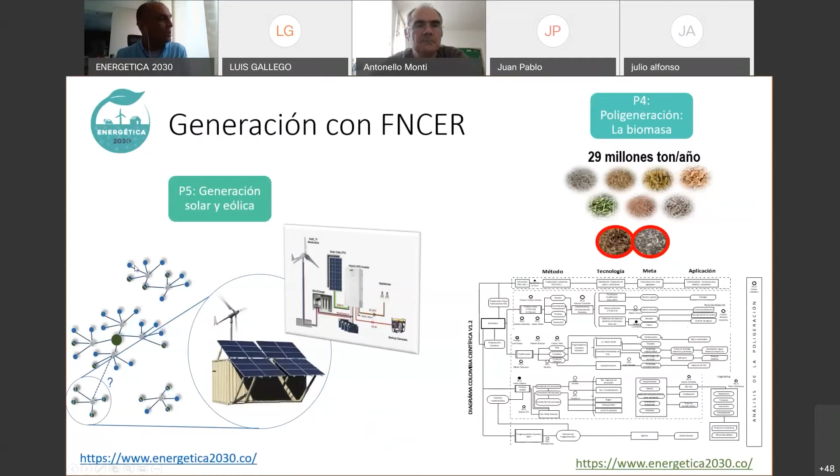Otros dos proyectos enfocados hacia la política de regulación de mercados que se van a tener con estas nuevas características. Análisis de escenarios futuros, cómo serán los escenarios del 2030, cuáles son los aspectos que pasarán, y de eso hablaremos en una futura charla de estos webinars.

Tenemos otros dos proyectos: proyecto 8, que es de pruebas de microrredes con conceptos de microrredes en diferentes instituciones para probar diferentes esquemas que se pueden tener en estas microrredes; y un proyecto que yo lidero, que tiene que ver con la supervisión, control y protecciones de sistemas eléctricos a gran escala, que va muy de la mano con la operación del sistema con XM.

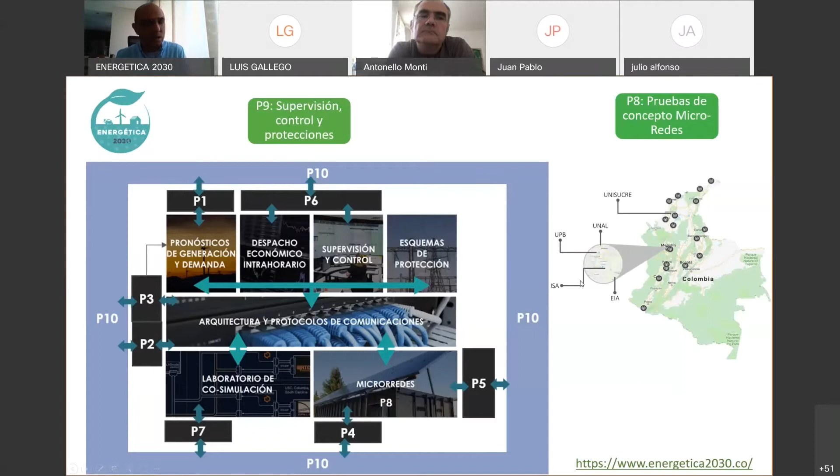Y finalmente, el proyecto 10 está relacionado a la apropiación social y alternativas de producción de consumo de energía en Colombia. Es ver cómo estas tecnologías se pueden realmente transferir, porque es uno de los retos más importantes de la transferencia. Y aquí participan antropólogos y sociólogos que nos están ayudando a desarrollar este punto.

Como les decía, el proyecto P9 es uno de los proyectos más ambiciosos que tenemos, enfocado en varios objetivos, pero que finalmente hace toda la integración de los centros de control del futuro y que permitirá avizorar cómo desarrollarnos. Aquí tenemos una interacción muy fuerte con el equipo de la Universidad de Aachen y Jülich, especialmente en todo lo que es simulación en tiempo real.

El profesor Antonello Monti y el doctor Mirz nos van a mostrar una de las teorías que han desarrollado en los últimos años sobre dinámica, la teoría de fasores dinámicos y su aplicación en sistemas de potencia. El profesor Monti es el líder del Instituto de Automatización de Sistemas de Potencia Complejos en el centro de E.ON de energía, en Alemania. Y Marcus es el líder de software, de productos de software y desarrollo de modelado para simulación en tiempo real. Son los coautores de los fasores dinámicos como el DPSIM, un simulador de tiempo real.

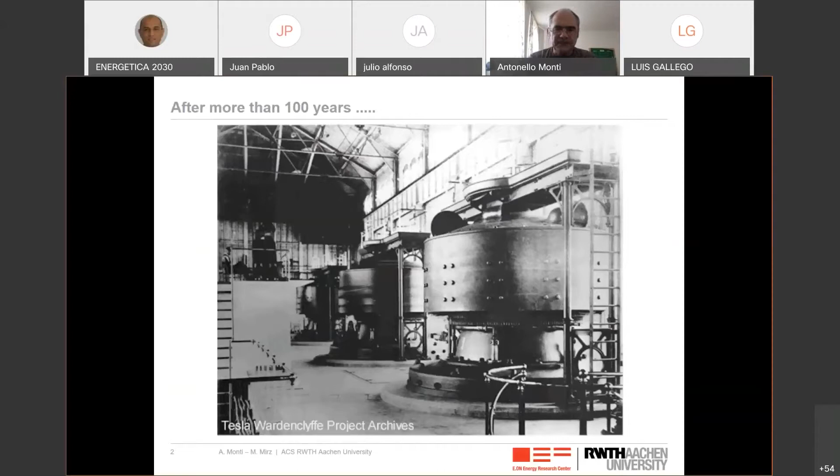If we move forward about 100 years, next, then we get some more recent development. This is a DC-DC converter built in our research center, mostly by my colleague, Professor De Doncker.

That's full power electronics. So after more than 100 years in which some fundamental concepts were basically written in stone and clear, we are now moving from an electromechanical network to a network that progressively is more and more an electronic network. Because we're talking in the context of 2030, at least looking at the current ambition of the European Union and the member states, 2030 will mostly already be an electronic network.

But what's interesting is that even today, if you look at some numbers, particularly more familiar with Germany, we already had instances in which the network was running with extremely high penetration of renewables. We have to distinguish between energy as a quantity over a year, a month, or a day, but from a power system dynamics perspective, even 10 minutes running with 100% renewable penetration means the presence of electromechanical devices has been dramatically reduced. It's still not zero, those rotating masses are still there, but we're clearly moving toward a situation where their presence is reduced.

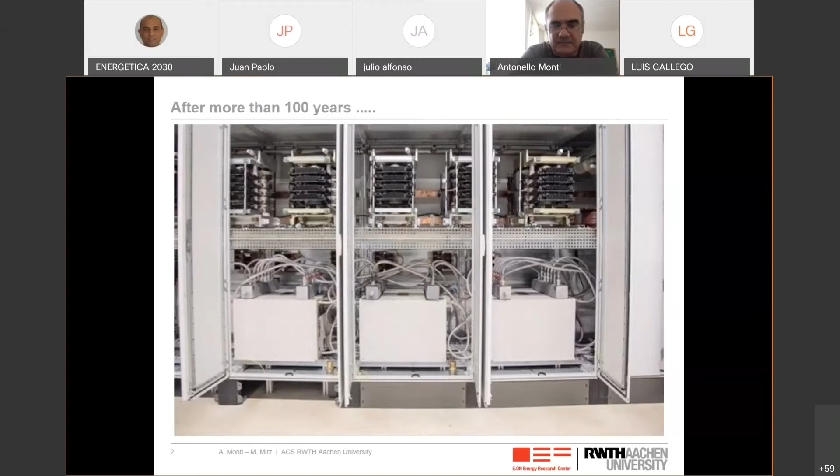What does that mean? That means that some quantities, like frequency for example, become a little bit harder to define.

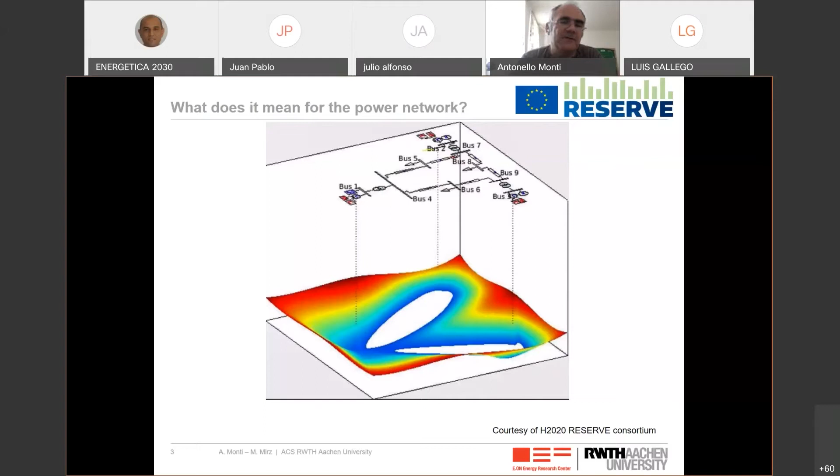This animation is something we did together with our partner, particularly University College Dublin. My colleague Federico Milano developed this scenario in the EU project Reserve. What you see here is an animation on the famous 9-bus system from IEEE, slightly modified for the purpose, introducing more renewables. While we're used to thinking about frequency as a global quantity, in a simple scenario like this one, frequency—shown in the color map at the bottom—doesn't have a steady state value and is highly dependent on position, so classical ideas of a common frequency across the power system are hard to support as a reference for modeling or analysis.

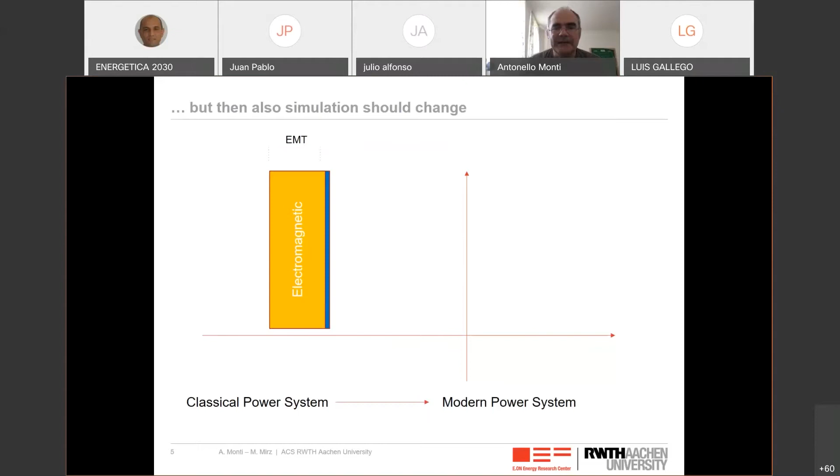Fast forward into the future, and from the classical power system we move to the modern power systems, and we need a tool that fulfills the new categories of eigenvalues and the new mix with not clear separations. That's what we've been trying to target with what we call dynamic phasors.

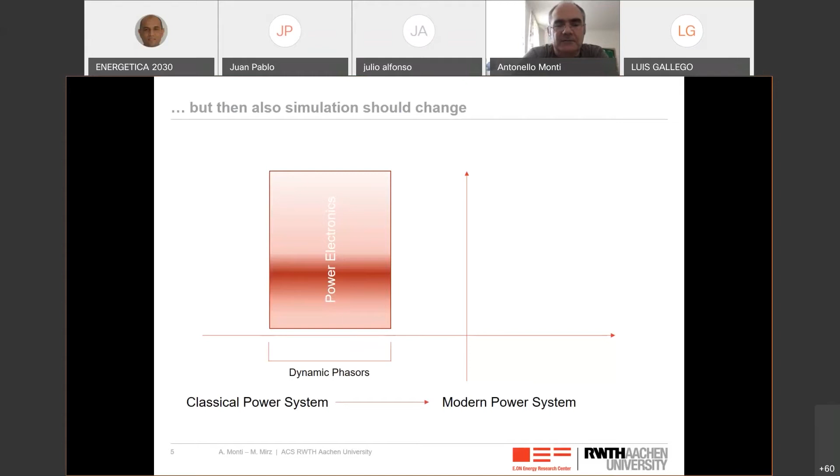I'd like to clarify from the beginning, and Marcus will be even more precise than me later. We use the term dynamic phasor, even though internally I've been discussing a lot if this is appropriate, because dynamic phasor is a quantity defined in a clear standard from the PMU point of view. Our definition of dynamic phasor is broader in frequency, more flexible. It's the best name we can have at the moment - there isn't a right terminology, I would say. But the idea is that it's a phasor with time dependency.

How large is the spectrum with which we analyze this phasor? It's a choice that, nice to know from the beginning, in our simulation approach can be done even at runtime. That's, I think, one of the major features and value of the work that Marcus will detail in the next few slides, because we really have a flexible tool that even online can adapt its capability of modeling.

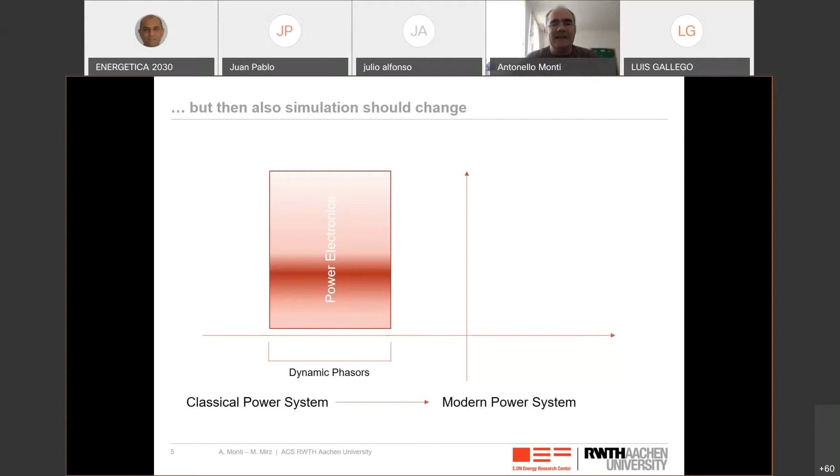A little bit more then on the motivation. We have been investigating why we need this solution. We've been trying to find a new solution capable of real-time simulation to improve system models, and also to look at the possibility of applications like digital twin. So creating a flexible model able to run in real time, able to run and learn from data - this is another important feature. And so having the possibility of both scenarios, offline and real time, but clearly a major part and major interest is in the real-time simulation part.

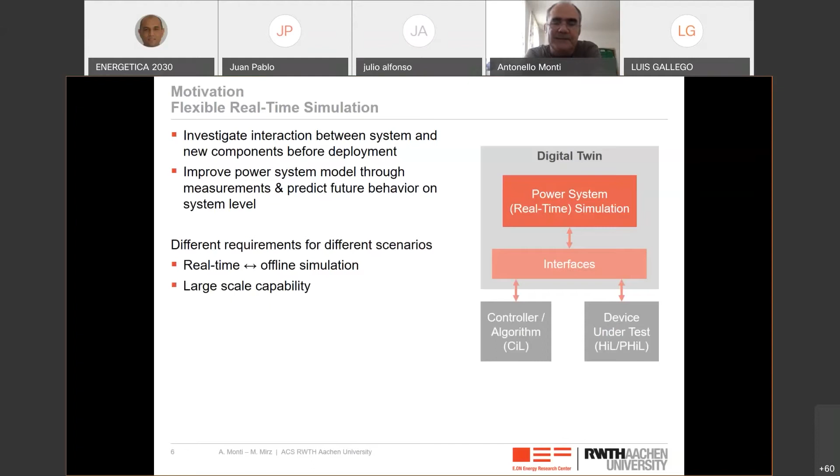We want to have large scale capability. My personal dream is one day to have a very good interconnected model of the whole of Europe, but at the same time with the capability to go also into high levels of detail. Those two requirements in the past were, by definition, somehow a contradiction. So we need a new simulation approach able to change focus and bring together those two requirements that originally and traditionally were in contradiction.

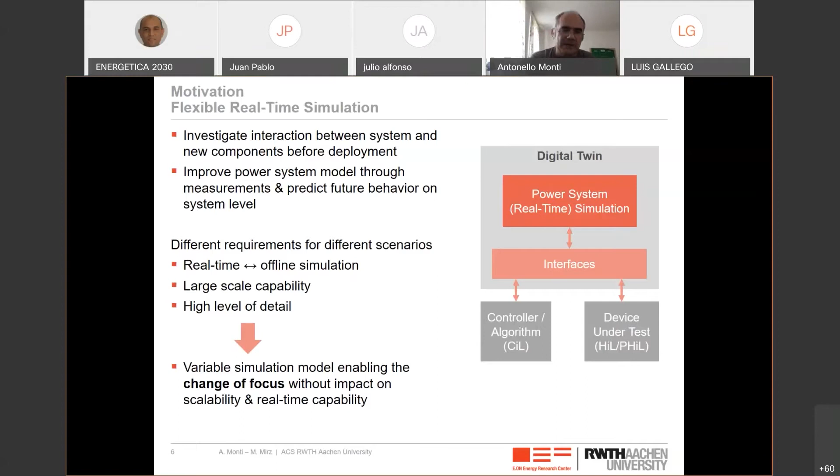That's basically how, looking from standard solutions and also market-level tools that we have, starting from the classical definition I said before, the different types of eigenvalues and dynamics - the thermal electromechanical could be tackled by large high-performance computing clusters, with a high level of scalability, but using basically static simulation from the electromechanical, let's say quasi-static.

And then the idea to go to electromagnetics means normally right now going into custom solutions. There are a lot of very good commercial tools that apply high-performance computing paradigms, but using custom hardware and custom bus, all the way to, if you want to get to the details of power electronics, including FPGA as an option when we need to go down to the under-microsecond timescale that power electronics scenarios may require. But we don't have a way to smoothly integrate.

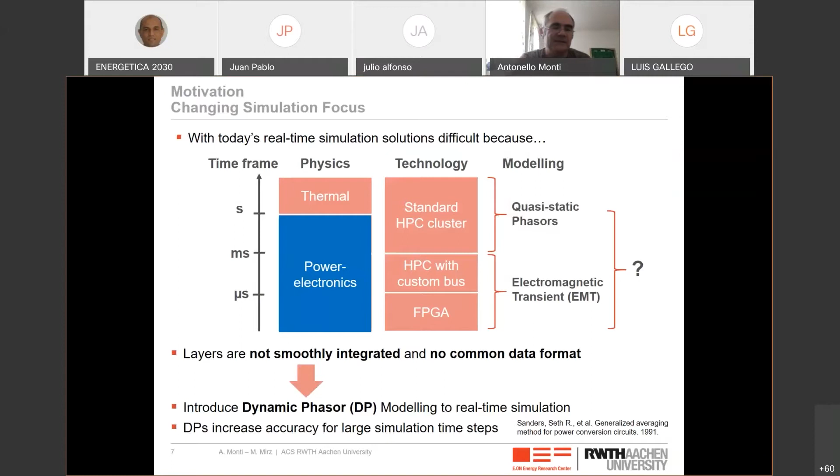That's what we need in the power electronics scenario. That's why we felt there is a need for a new approach that could do that and also allow us to have a good data management perspective. As we'll see later, that's also one of the tasks - to develop something able to work with data according to standards, so that integration of operations within a utility can be done without having a different format for simulation versus operation.

That's where this dynamic phasor modeling came into play as a solution, and it's basically an extension of ideas that have been around for a while. Here in the slide we reference a paper from Seth Sanders, developed at MIT in the beginning of the 90s. But what we have done is start from that fundamental theory and develop an open, flexible, extensible solver able to support this type of challenge that we've been discussing so far.

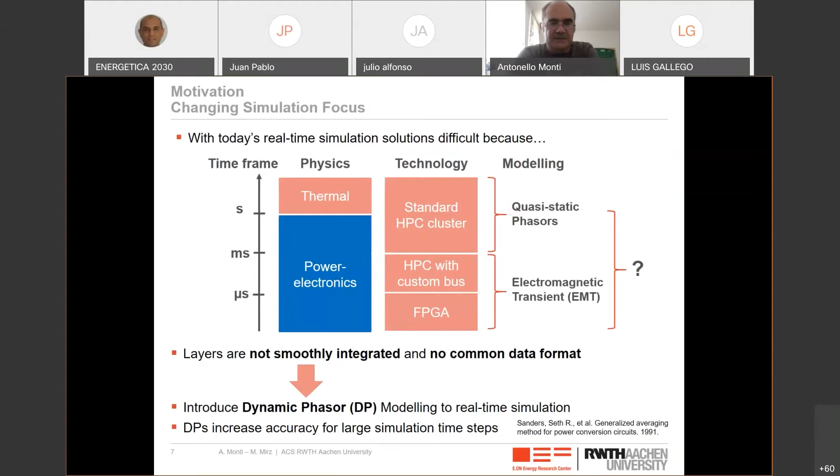From my perspective, last but not least, before I give the floor to Markus - we can also extend the time step, because we have the capability of keeping accuracy for longer time steps in several situations. We also support linking in real time different laboratories, research centers, or even different operating centers. That's the dream I told you about - connecting a network of laboratories in Europe for the definition of a digital twin of Europe.

But as you know, in Energetica, this dream is already going on in Colombia. It's a much more realistic scenario, I would say. You guys are really doing it already right now. And I think that's an interesting opportunity.

Particularly from the research perspective, this presentation and discussion today is proof of that - it's also a way to create collaboration and scientific exchange. Because we don't require specific hardware, we talk about democratization of real-time simulation. Everybody can use our software on any kind of PC or platform running Linux operating systems, which helps create international cooperation like the one behind the talk we have today.

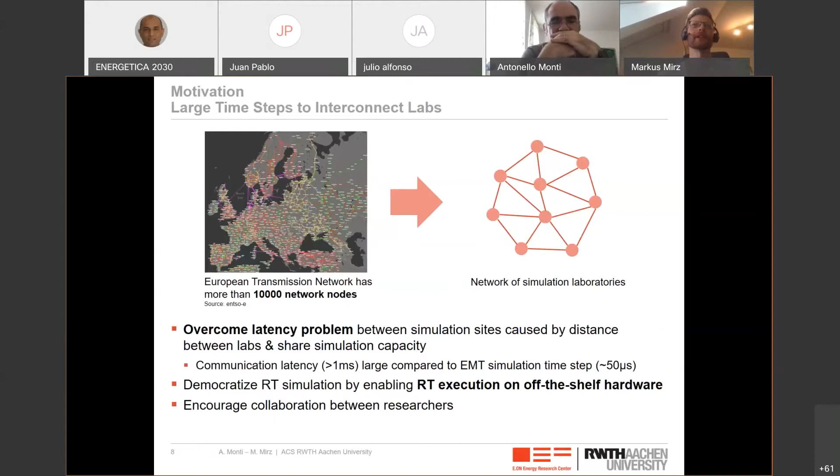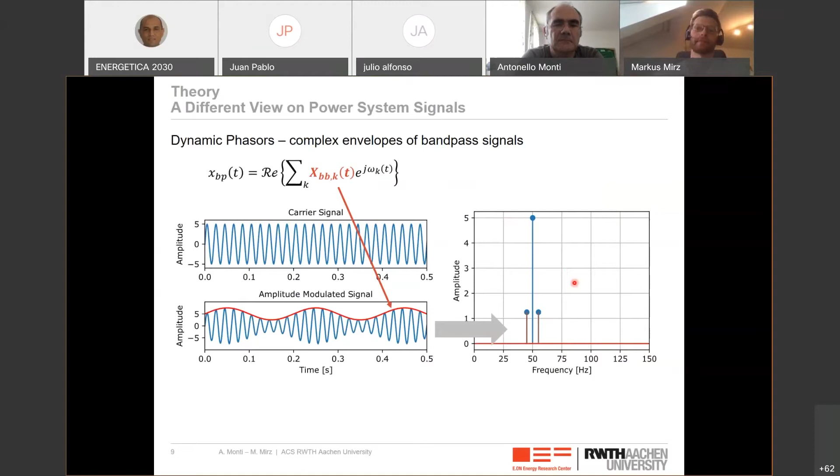A nice feature of this approach is that since we're not looking at the 50 Hertz plus signal anymore, but the shifted signal around 0 Hertz, we can simulate this with a lower sampling rate in our simulation. As Professor Monti mentioned, this approach bridges the gap between EMT and quasi-static simulation.

The idea is quite old, but I guess the reason it wasn't so popular for many years is that only now are we really looking into very high frequencies with power electronics coming into power systems. If we look at other domains, like microwave engineering, approaches like dynamic phasors - maybe they call it differently, like baseband representation - are much more popular there than they are in power systems right now.

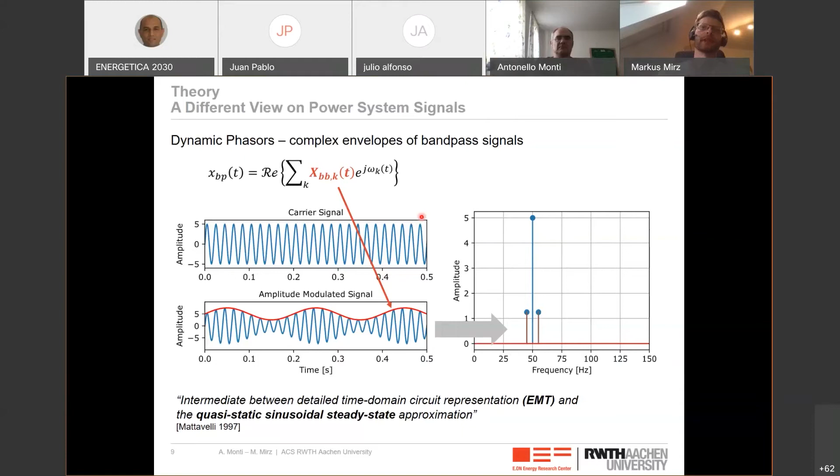So, the next question is: how can we use this approach in a simulation? For this, I want to demonstrate again why we can use a lower sampling rate in the process of simulating the dynamic phasors compared to our EMT signals.

On the other hand, if I use the dynamic phasor approach in simulation, and I shift my signal to 0 Hertz as I explained before, the sampling rate that you require is much smaller. In the previous example this was only shown for a 50 Hertz signal and some modulation of it, but you can actually use the same approach if you have several of these frequency regions or frequency bins. For example, here you can shift both of your frequency regions to 0 Hertz and use a larger time step, a smaller sampling rate.

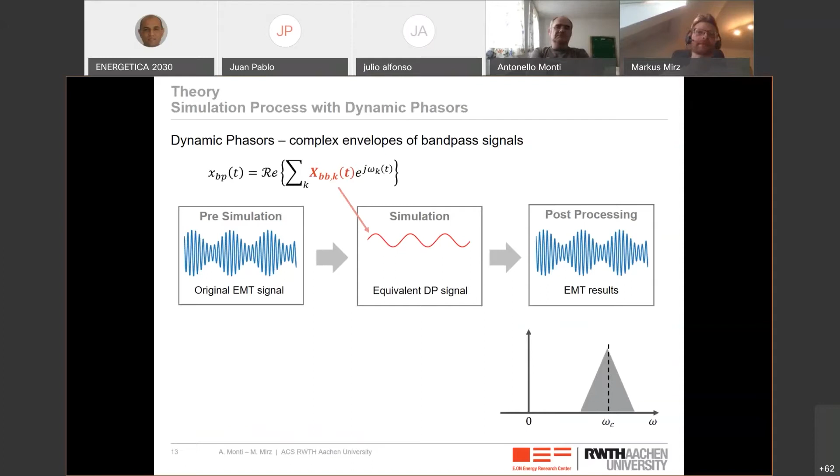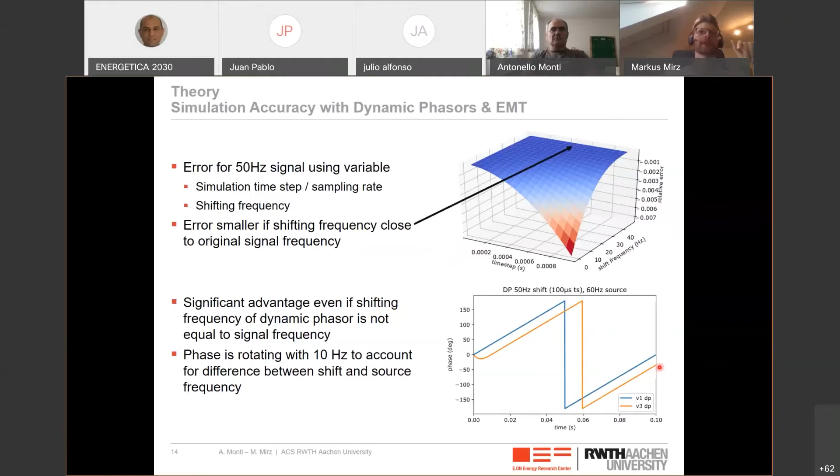But before we come to a simple model, I would like to briefly introduce the main ingredient to build our models, which is how we model dynamic systems using dynamic phasors. What we are considering here is the differential equation part of our system, and we would like to express this in dynamic phasors.

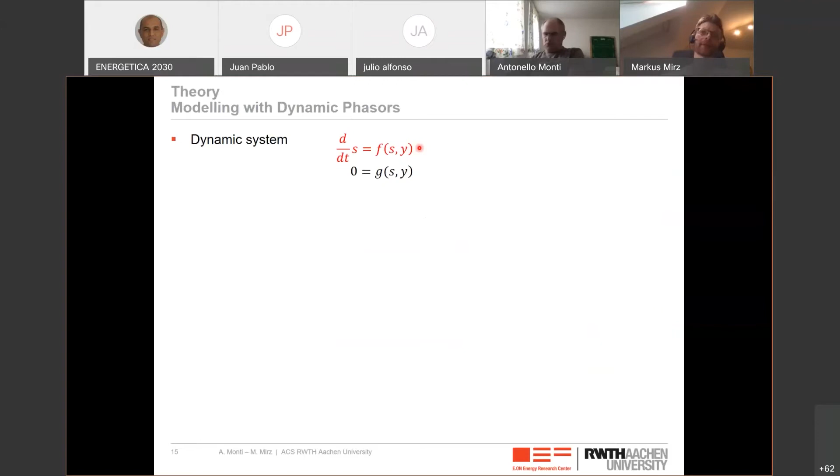First of all, we use the analytic signal instead of the real signal, which is constructed by having the real signal plus the Hilbert transform of the real signal. If you take the real part of this, you get your real signal again, so nothing really changes. One thing I want to point out here is that this is one way to construct a phasor, and later you will also see other ways.

So this is the first step, we construct our analytic signal. The second step is to apply the actual shift. Here you can see that we shifted our signal by our omega c, which is the carrier signal or system frequency. This is shown by these brackets, these arrows - this is usually used in literature.

So this is our analytic signal, but shifted by this carrier frequency. The question is now, if we have this dynamic phasor and a differential equation like this, how do we bring these two together? Basically, this is just using the chain rule on this phasor. If you do this all the way through, you get something like this, which already looks a little bit like a combination of our static phasor version and our EMT signal.

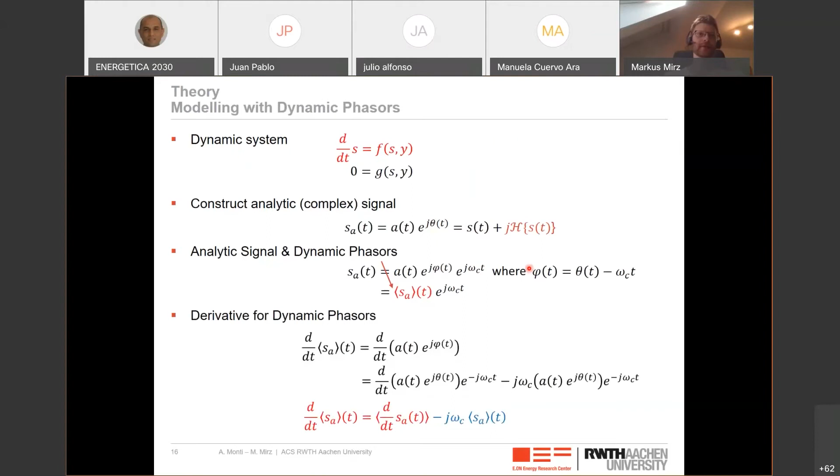Now, if we want to use this model in an MNA solver, this is very similar to the way how you would do it in EMT. You have some components that you can pre-compute, which are in blue here, and you have your unknown vector, which is X. So basically, you have your stamps in your system matrix A, which are GL, the conductance here, and you have a current source in the case of the inductance, which goes into the source vector here.

So I hope this looks familiar to anyone that has applied nodal analysis already. The only difference is that here we are talking about a complex matrix and complex vectors. These parts are known, the blue ones, and what we want to get is our X vector, which are in the basic case our voltages, the node voltages. From these voltages, we can again update the state of our component here in what is called the component post step. So this concludes the very basics.

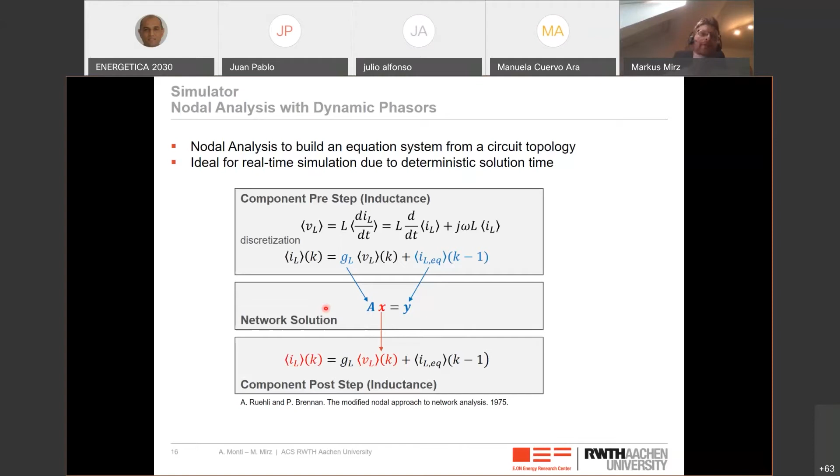So how can you construct dynamic phasors from real signals? How can you use the dynamic models in an MNA solver that include dynamic phasors? The next thing that I would like to talk about is, if you have this kind of mechanism for your solver, the next problem that you face, especially for real-time simulation, is even using this MNA approach, at some point you won't be able to solve this in real time anymore for different reasons that I will explain in the next slides.

So before we run into the problems, the first thing we can note is that using nodal analysis has one nice feature: the component pre and post steps, so calculating our system matrix and source vectors, these are things that can be done before the system solution, and they can be done independently for all these different components. The same for the post steps. So there is already something that we can parallelize. This is independent of using dynamic phasors or EMT here.

But the problem is that this system solution here, we cannot really parallelize like this, because we have this large linear equation system with the matrix A becoming bigger and bigger as the network grows, and we have to find ways to cope with this problem. So the question is, how do we distribute this large network?

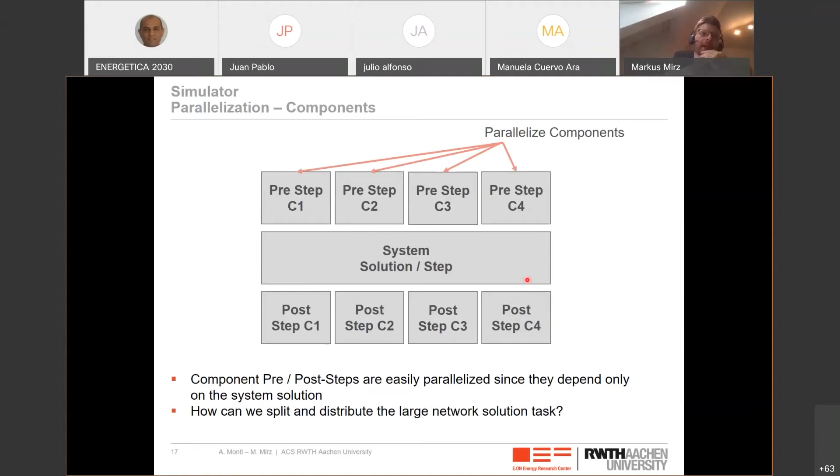Also in EMT, there are some methods to do that. In EMT real-time simulation: diacoptics and transmission lines. And as for the EMT dynamic models of inductances, capacitors, and all kinds of things, we have also adapted these methods to the dynamic phasor case.

So using either of the two methods, you can now decouple the solutions of portions of the system and compute them in different threads of your simulation. The two methods are a little bit different in that for diacoptics, you usually don't need to change your model. You don't need to, like for transmission lines, consider that the lines are long enough, introduce this special transmission line model, and so on. You can keep, for example, pi lines and just distribute the system at these pi lines.

But in addition to the subsystem solution in diacoptics, you also have one meta solution basically, which brings all these solutions together. So the decoupling is not as nice as for the transmission lines, as we can also see later when I come to the results.

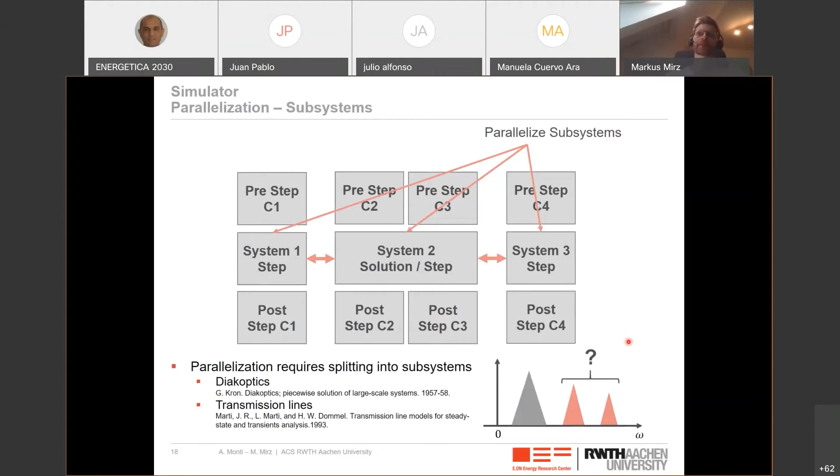And the basic assumption for this step is that if we look at the network, so not the components - for a component, I would say here in this case is, for example, power electronics inverter or synchronous machine, they are connected to the network - but if we are talking about the network, which is transformers, lines, switches, these usually don't include nonlinear models. And because of that, there's no cross-coupling between the different frequencies, which means there's also no cross-coupling between the different frequency bins.

So we can basically assign each frequency bin to one instance of the system that only covers a particular phasor. So for this case where we have 3 dynamic phasors, we have for each subsystem 3 additional systems, and each solves one of these dynamic phasors.

So now, as I said, this is fine if we have linear models, but what happens for where do the nonlinear components go? Because we cannot linearize everything. Of course, you can linearize everything, but maybe you don't want to do it in any case.

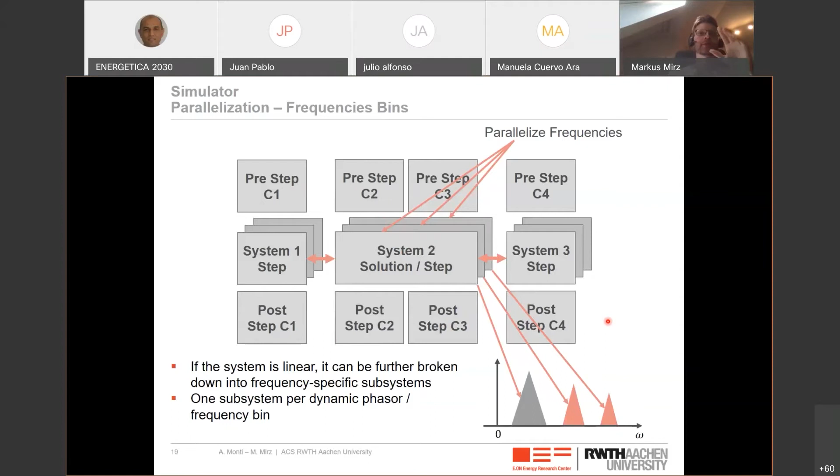And this is, by the way, open source. So you can use it without asking permission. You can extend it and use it for your research, for your publications. So feel free to look into it.

And the main purpose of DPSim is actually to have a dynamic phasor-based solver library, but we also have some EMT models in there. Actually, we built quite a lot of EMT models to have an offline reference with a very small time step to compare to our dynamic phasor models.

And recently, we also started to introduce a power flow solver, which is quite important if you want to run your dynamic simulation, but you don't have all the power flow results for initialization from a different software package, or you cannot import these results for some reason from the other software package, then it's quite nice to have a power flow solver as well.

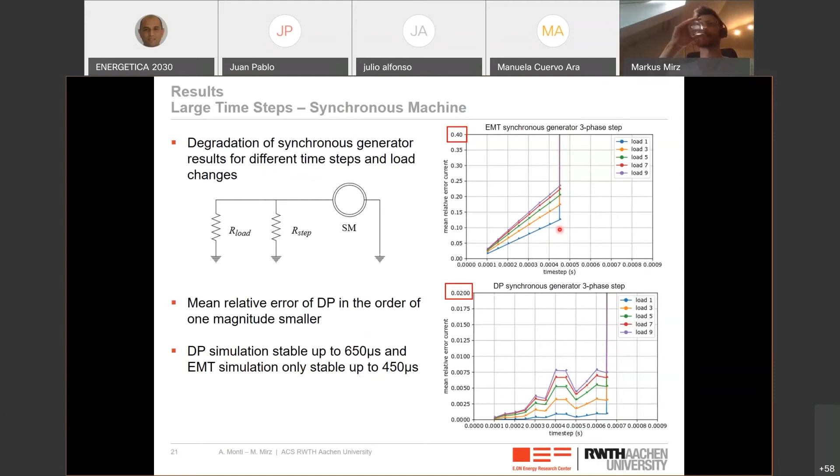As I said, also for a static phasor, you might see a continuous change of the phase if you do a quasi-static simulation with your dynamic electromechanical models. But the difference is that these dynamics are not correctly reflected in the network part, because you are treating the network, when you use the classic static phasors, as a static model.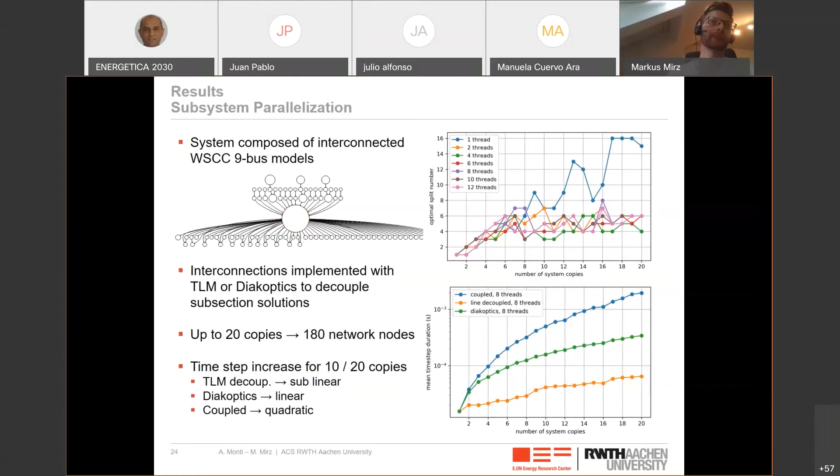what is the advantage of parallelizing the components. And in this case, it's the opposite compared to before. Here we had the big bubble as the task with a big simulation time, and this is computation time, and this is here the network solution. And here it's the opposite.

The last thing that I would like to show, because so far we only talked about more or less the classic network with the synchronous machine, the error, and the simulation time that it takes. But as Professor Monti said, we are introducing more and more power electronics. And this is where dynamic phasors become really interesting.

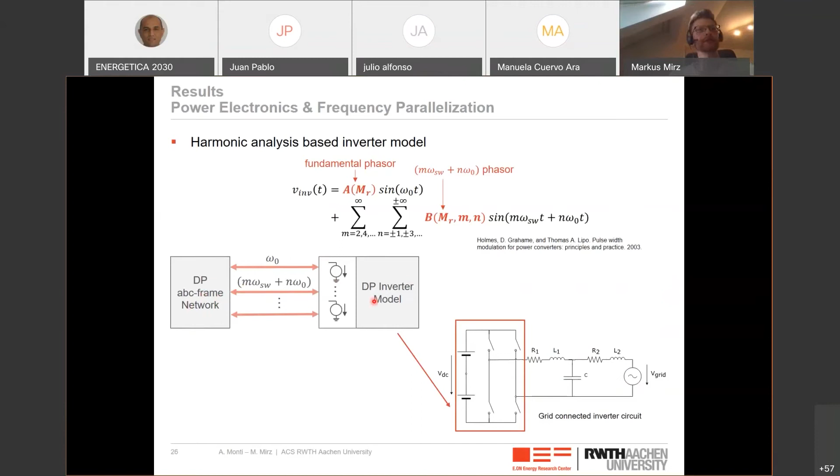So basically you have multiple voltage sources and they are all injecting into the network solution. You get your network solution back in this DP inverter model after one complete iteration. And based on this, you can compute, you can update your voltage sources.

And here is where this nonlinearity comes in that I talked about before. This control that is controlling this inverter model here might be dependent on multiple frequencies. And this is why you have this cross coupling, at least in the DP inverter model.

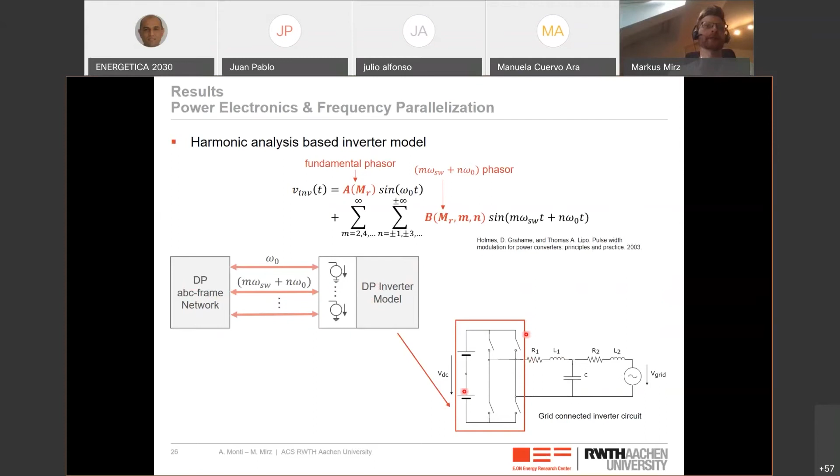And we use this DP inverter model to replace the switching converter in this simulation model here. So in the DP case, you take away all the switches and replace them with the voltage sources. And this is a comparison of this dynamic phasor model compared to Simulink. On a broad scale, it looks completely fine.

If you zoom in, you can see that the ripple of the dynamic phasors doesn't match, so this is again post-process, maybe I should mention this. Here we already took multiple phasors, 8 in this case, in addition to the fundamental, and put them all together and shifted them back to get an EMT-like signal. And this is the result here.

But you can actually get better. The more and more dynamic phasors you add, the more accurate your results become. And this is maybe drastic because you don't need this kind of detail in all the cases, but it's nice to know that you can get there if you just use dynamic phasors.

The problem is, as I said before, I talked about 3 frequency bins that you could use in the simulation, and that are each shifted to DC. But if you go to 28 frequency bins and your fundamental, you are really increasing your network size. Even if you have just very few nodes, like in this case here, you are increasing your network size dramatically.

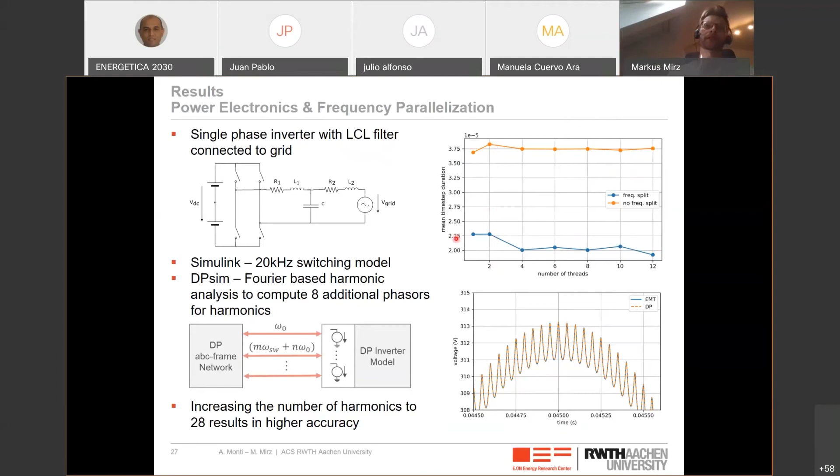This is the monolithic version where you have your system matrix, which is increased by these 28 dynamic phasors, and this is the split version. Although it's not so much in this case, because these 29 matrices that you get out of this are very small, you can see that the split is a lot faster, and it becomes even faster if you add more threads. This will be a lot more if your network size, your node number, is bigger.

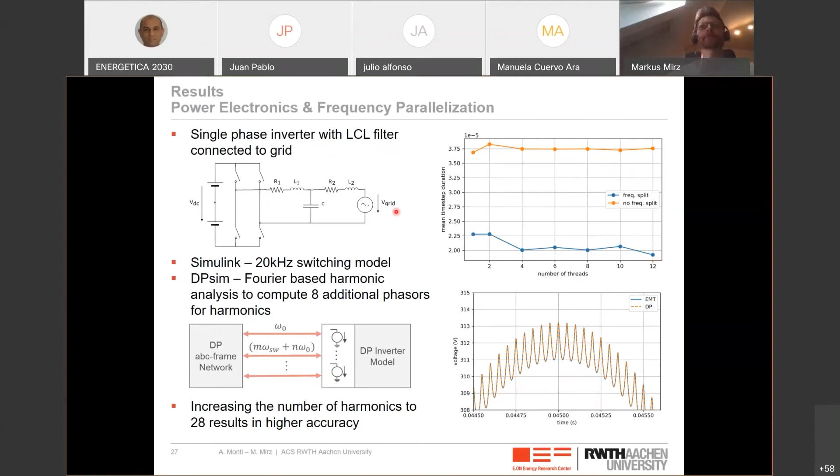This brings me to the conclusions. We think that the dynamic phasor concept is really nice for this integration of EMT and DP, and especially for increasing the simulation time step, for various reasons. This can be to interconnect simulators, to run on off-the-shelf hardware—different reasons why you would like to increase your time step.

But I would assume that the current trend of going to FPGAs to get smaller and smaller time steps, if you continue in this way, it will become more and more difficult as power electronics become faster and faster, from kilohertz maybe to megahertz switching frequency. I wonder if you can keep up if you want to do this in EMT in real time using FPGAs and technology like this. So I think dynamic phasors is really a nice way to completely get around this race between simulation time step and, in the end, the switching frequency of your power electronics.

With DPSim, we already took some steps. Actually, there are already several publications in dynamic phasors, especially when you look at classic power systems—you find a lot of publications about the shifted frequency approach and how to simulate a synchronous machine. But I think what was really missing so far is something that you can start from, so you don't start completely from scratch.

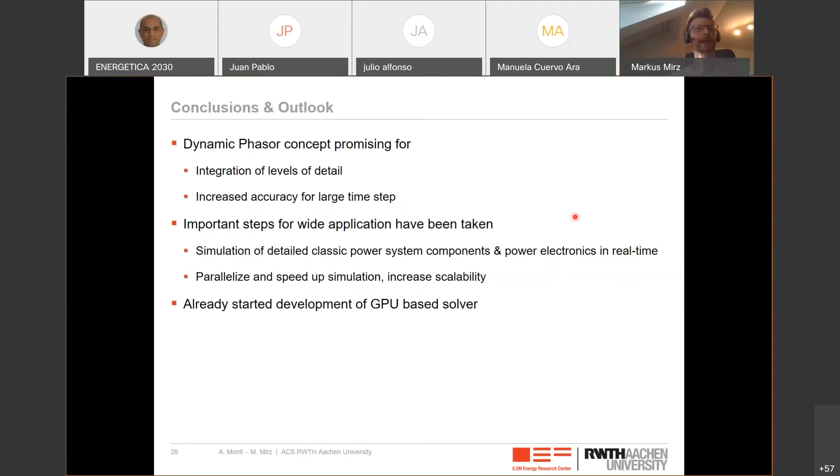We already started to go from the CPU to GPU. This is especially nice if you have large system matrices that for some reason you don't want to split using diacoptics or transmission lines. First tests we already got for this 9-bus system—I think a speedup of 2 to 3, not using any smart techniques, just using the GPU, which is really cool.

Future ideas that we have really not started to work on yet: to integrate nonlinear models into the network solution. This is quite bad for the parallelization of dynamic phasors, because then the assumption doesn't hold that I stated before. But on the other hand, you can expect better stability, for example, for the synchronous machine model. So there's a trade-off again, but I think it's interesting to explore this direction as well.

At the moment, we are modeling in C++, which is not super user-friendly. So we are also looking at different alternatives—how to, for example, use Modelica models, generate C code, and integrate this in DPSim.

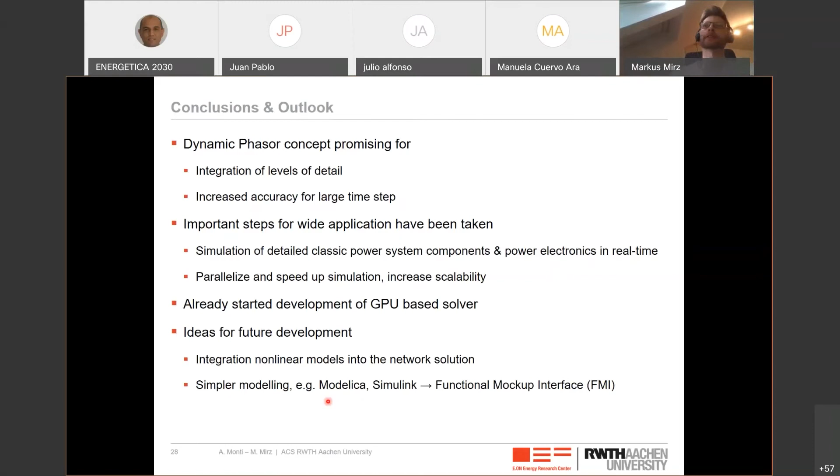With this, I conclude my presentation. It was a little bit longer than expected. Sorry for that.

Maybe I hope that we have time to cover the questions here. I'm starting to read them now.

Thank you, Markus. Thank you, Professor Monti. It was really, really nice, your presentation. Thank you for having here. There are some questions—I think you can see some of the questions in the chat. So if you don't mind, you can read them. I think I can read them myself.

So the first question is: what is the relation between stability simulation and the dynamic phasor?

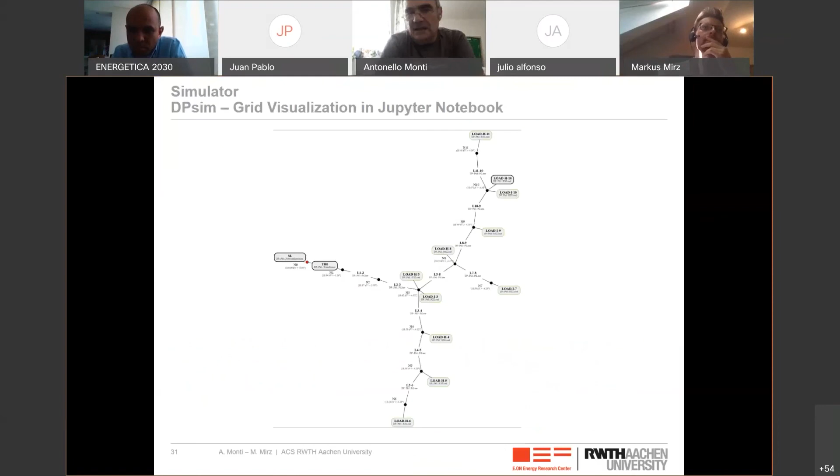So for example, co-simulation between DPSIM and OPAL, classical OPAL EMT, or DPSIM and RTDS, to be fair representing both commercial tools, is possible. So in principle, this is not a problem.

What is the size of the largest network you have simulated in real time, and the number of cores? In the first publication, you can see an example of 40 copies instead of 20 of this 9-bus system. So roughly 400 nodes. That's, I would say, the largest network that we have simulated so far.

We always used 12 threads as a maximum at the moment, because we never wanted to exceed the number of cores with the threads. We had 12 real cores in the CPU, to answer that question.

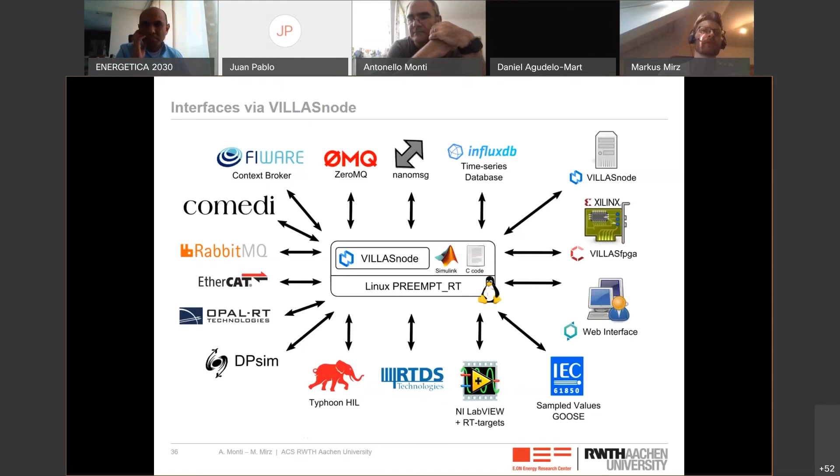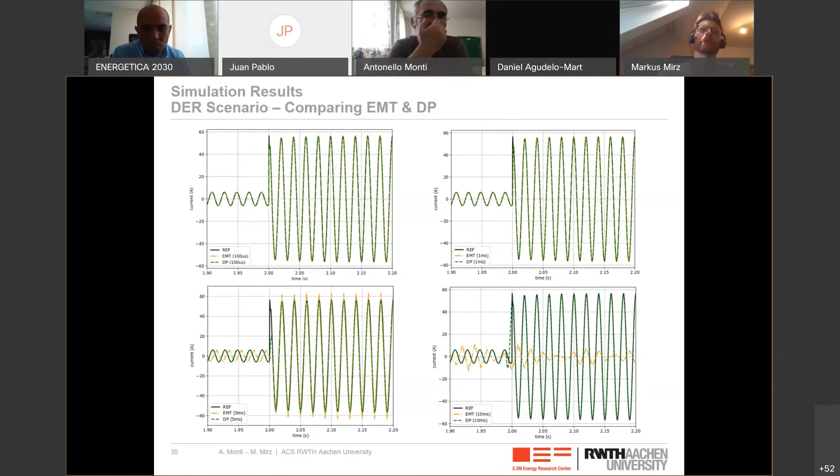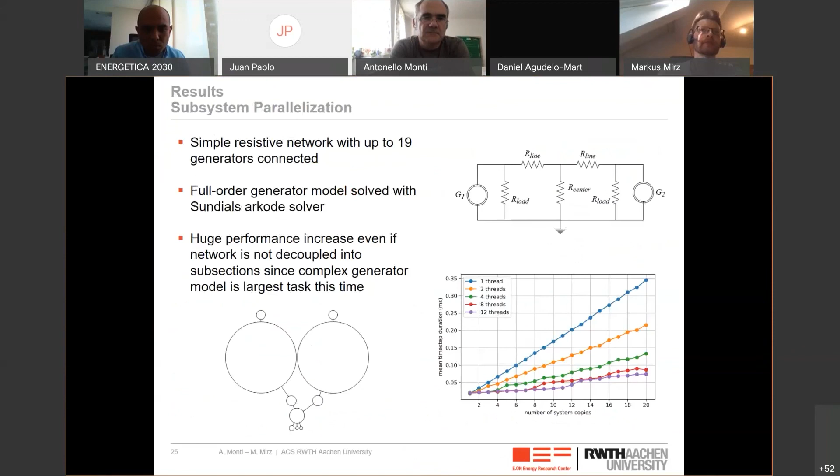We had this one, which I didn't show previously - it's in the backup slides. This is actually inverters with a drastic load change, as you can see, but in this case only using one phasor. This is what I wanted to show actually - here we also have a fault, and we have high frequency components in this.

This is why for this simulation to be very accurate, we have to go to a very small time step if we really want to simulate this failure. We don't split this high frequency part into several dynamic phasors, and this is something we have not done in this case. So we have done high frequencies for the power electronics case, where using Fourier analysis you can get your higher frequency bins, and they are more or less stable - they don't completely disappear and reappear like in the failure case.

We have also done this kind of high frequency simulation with only one phasor, but we haven't done this kind of simulation with several phasors, because for this case, at the moment of the failure, you would need to know what the frequencies are. You would need to do some kind of analysis, maybe Fourier again, and then branch out to have several frequency bins that you shift and then simulate with a much larger time step. So this kind of unexpected failure, in comparison to something you can expect like the switching of the inverter, is more difficult to address with this separation into different frequency bins.